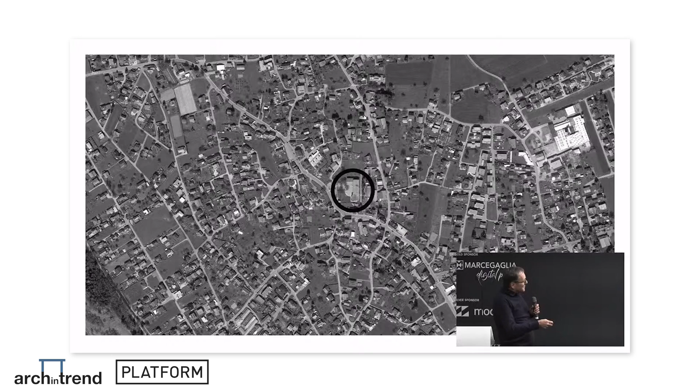As you can see, the town of Höchst is basically single-family houses, not very big, not very large - small houses. Especially this area, where the school is, is not the center of Höchst, it's more in the outskirts, and the surrounding buildings are these small houses.

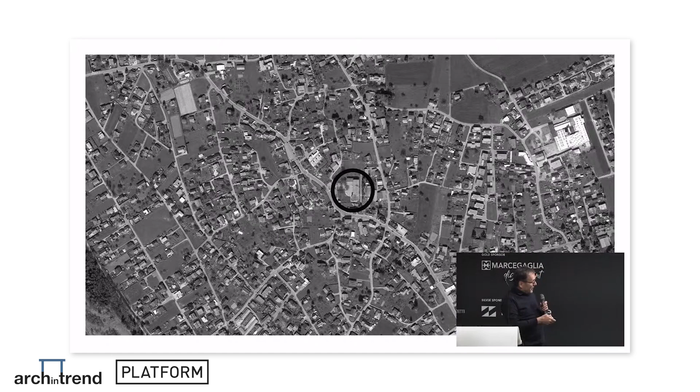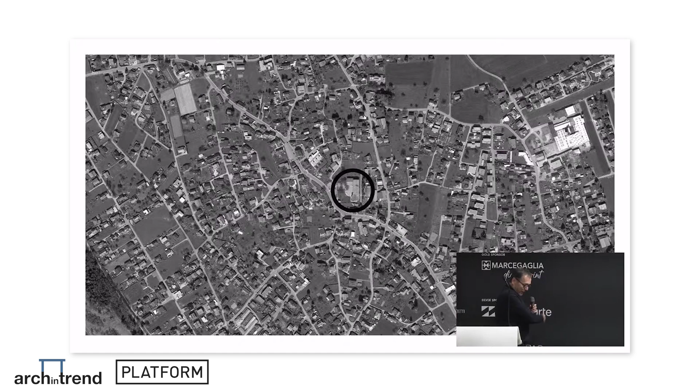On the right side of the school there is also a gardening center, and several commercial sites, but mostly single-family houses. The project is very close to Lake Constance - 1 kilometer to the north - and Switzerland, here where I am, is already Switzerland, so you can imagine where the house is.

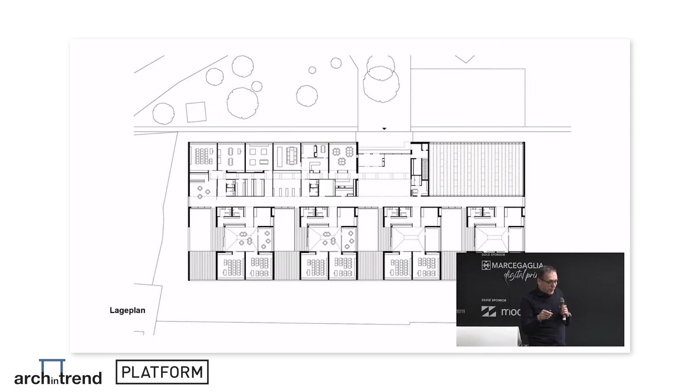The school is a cluster school, a system very much focused on new educational needs. You can see the 4 clusters, which are separated by small courtyards. Each cluster has 2 classrooms, a smaller room for smaller groups, restrooms and a wardrobe, a room for the teacher, and the center, which is very important, is the learning area connected to the classrooms.

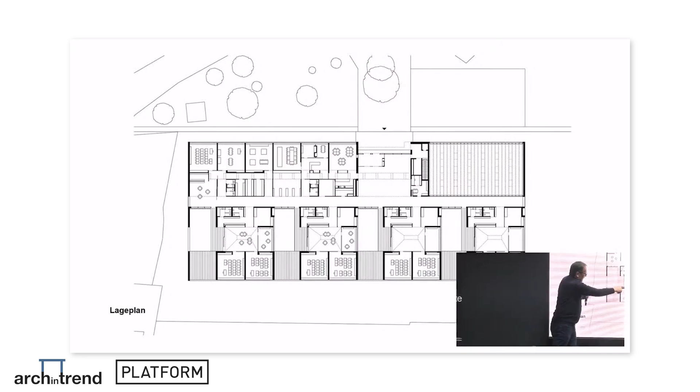This wall is also transparent, so the teachers can also see what happens outside, but the two classes are fixed together to one of these clusters. Every cluster also has an outdoor area which is open to the gardening center. It's very close to it, so the school participates in the plants and gardens, and the gardening center is participating by the light - we didn't build 3-story high, so they get more light for their plants. Both sides have a good combination of how to share the space.

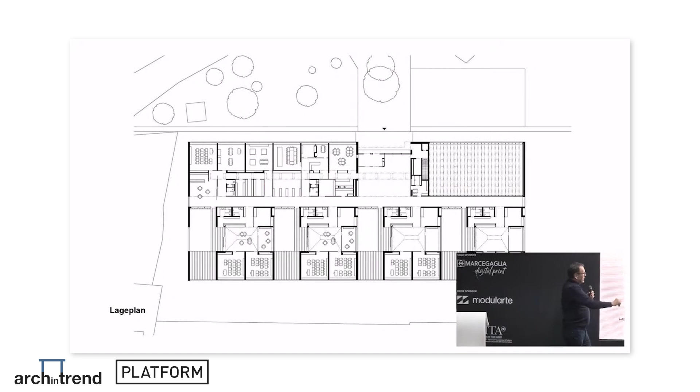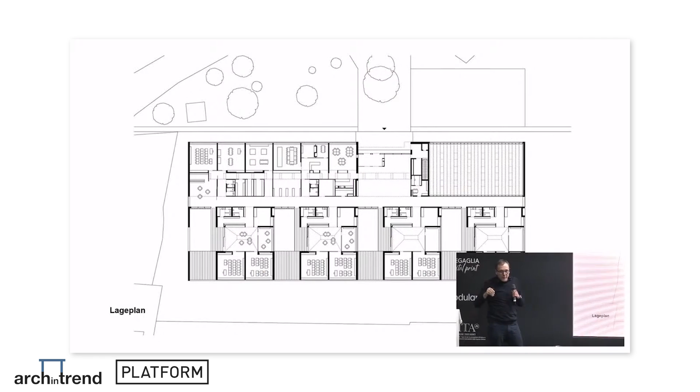This is the main road, about 100 meters. The whole building is 40 by 100 meters. Here you have the special class, that's the library, and the entrance with a room for events. To the top there is the gymnasium, which is the only space that's dug down to the ground, and it has a normal height of 7-8 meters.

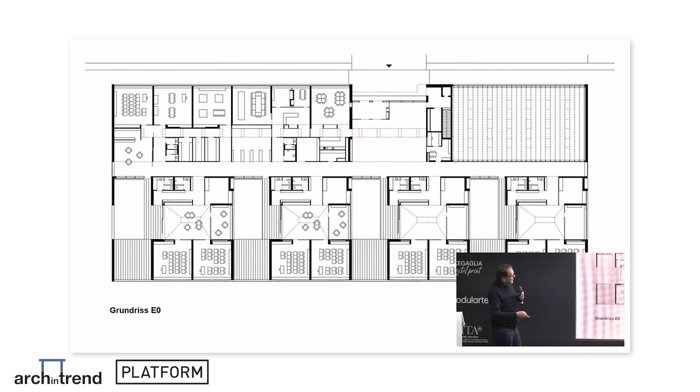That shows a bit more detailed what I told before - this is the underground area of the gymnasium and the fitting rooms.

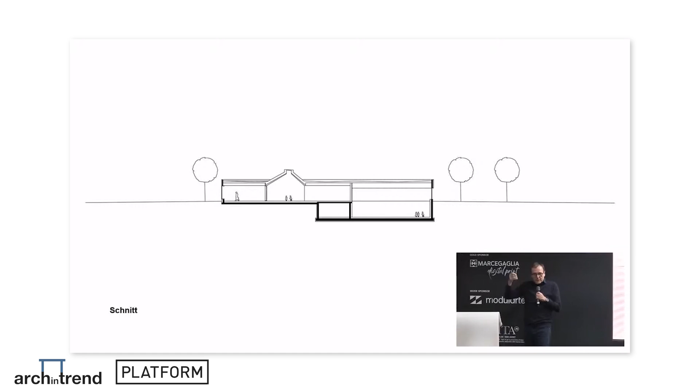That's the section with the 1-story building, and the only thing higher than these normal 3-meter rooms is the learning center, which is like a chapel, getting light from the vertical.

That's the view from the gardening center - you see 2 classes, and in between, this small courtyard which is for outdoor education, but also for working with plants, growing plants, working with different materials, and so on.

The whole building, from the basement up, is wood, and we were very much focused on a very simple construction.

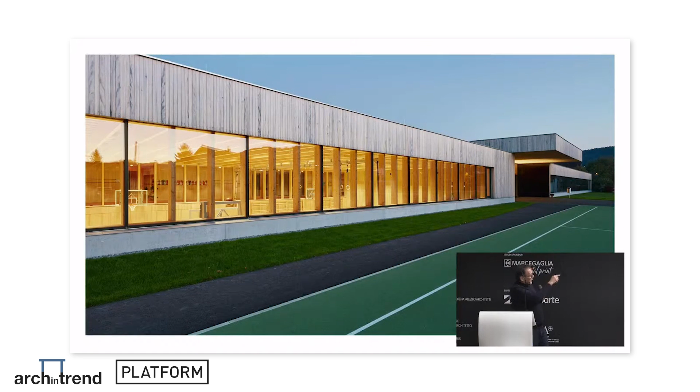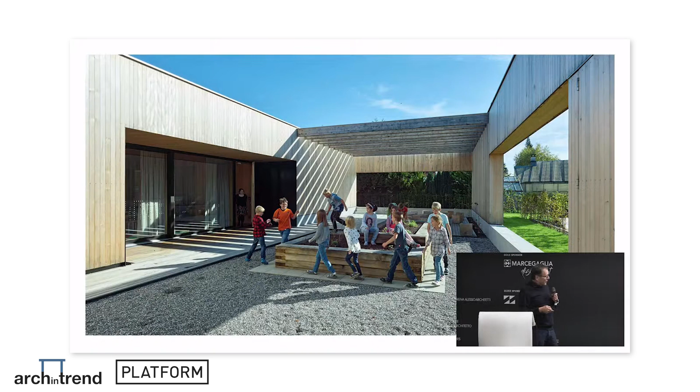That's one of the pictures with the entrance and the gymnasium. The gardening area, and that's part of these courtyards where the children have the possibility to grow their own plants, to look after them and see how it works. On the right side you can see the glass houses, and it's also more or less a private playground for the group, for the 2 classes, which is shaded a bit by the timber construction.

We left the wood completely untreated. We didn't put any color or any treatment on it, so it turns into gray, and after a while the building will be very integrated into nature, into the green.

We have also the playground, we have the sport facilities around, and here you can see very well the level of the buildings, which is very low, so we didn't want to create a very strong, important building in between. On the other side of the valley, you can see the first mountains of the Alps.

The fitting rooms, and the gymnasium. Yeah, and here are two pictures from construction. Here you can see this two-layer CLT, which was protected, and the CLT roof, and the ground floor with the heating, the very simple beam construction, and that's it.

I have to show you how it came to this project, because we started much earlier with a bigger project in timber construction. It was a competition in 2001, and the school was finished in 2003.

This is the school, that's the gymnasium, and this was in the early days when it was finished with this copper facade, which is a perforated copper shading of the south facade, and the classrooms and the special classrooms underground.

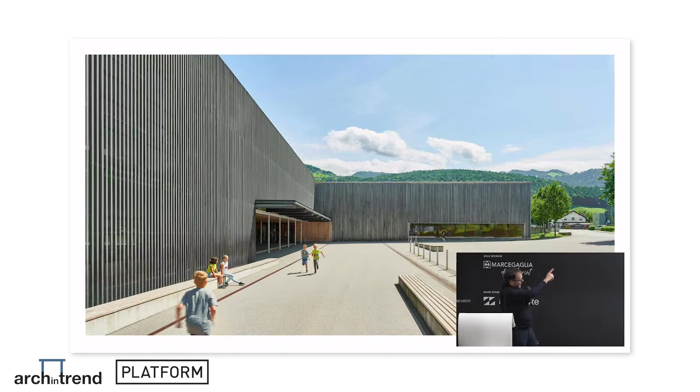It's for the 10 to 14 years old, and here you have the classrooms on the right side, which are getting light from both sides, from outside, but also from this inner courtyard. The classrooms are connected to the corridor with bridges, so you have this both-side light.

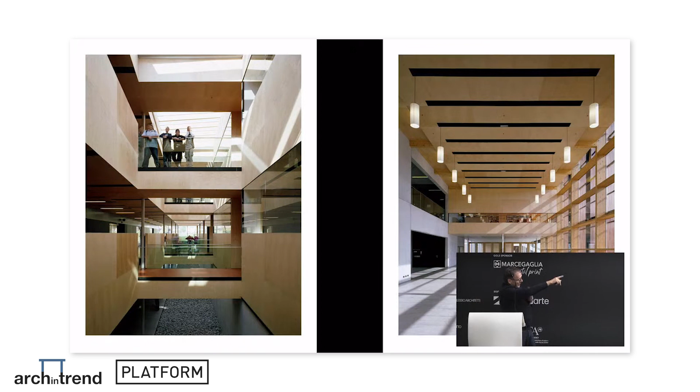On the right picture, there is the entrance hall with the library on the first floor. And that is the corridor with the changing areas and the bridges to the classes.

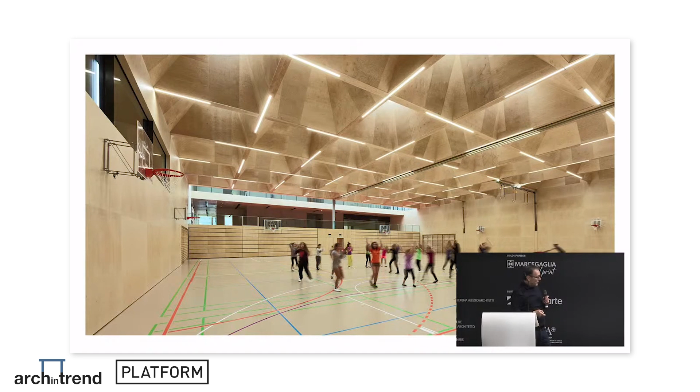The schools are a bit different in France than in Austria or in Germany. The basement is a concrete construction. Inside is wood. As you can see here, it's a bit like the school in Klaus with the bridges to the classes, but more simple in construction.

That's what we learned in France: it's better to keep timber construction simple and easy. And that's the same structure with the acoustic elements.

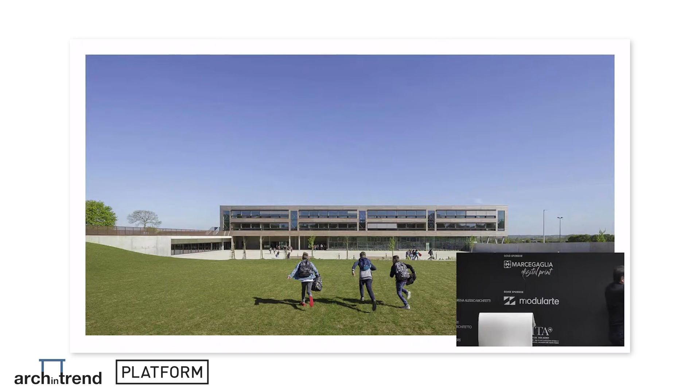And the last one is a bit older, from 2015, very close to the other one in Broons, in Bretagne. Here you have these areas with the kitchen, with the restaurant, and the classrooms are upstairs.

And here also these constructions, the handrails are beams, which are important for the construction. And that's it. Thank you very much.